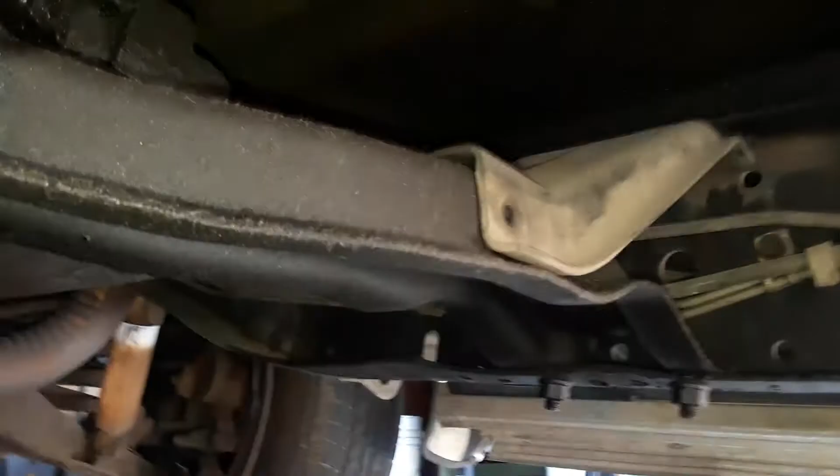Okay, Richard, we're under your truck. I gotta drop the exhaust to get to that transmission cover to see what the heck is banging in there. And I already checked the EGR. I already checked the ignition control mod, I mean the ignition coil. We put a new one in. So you already know that.

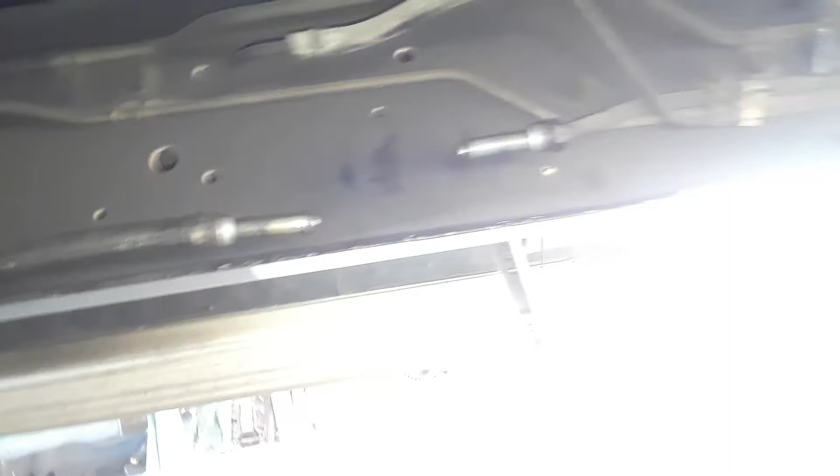And I was taking off your filter. There's your filter. Let's see. It's kind of dark. Let's see if I can brighten it up. It's as bright as I could get it before it looks distorted. But I took the filter off, and I'm gonna give you a zoom-in close look at your O-rings.

This end of the filter was already loose. So what you're doing is sucking in air bubbles through that side as it's being pumped to the front. This side was tight. But if you can look as I get it close, these O-rings are thrashed. There's the O-ring there. Those O-rings are no good, so I'm going to pop those off and put brand new O-rings there. But I do recommend that we change the fuel filter. That doesn't look like it's ever been changed.

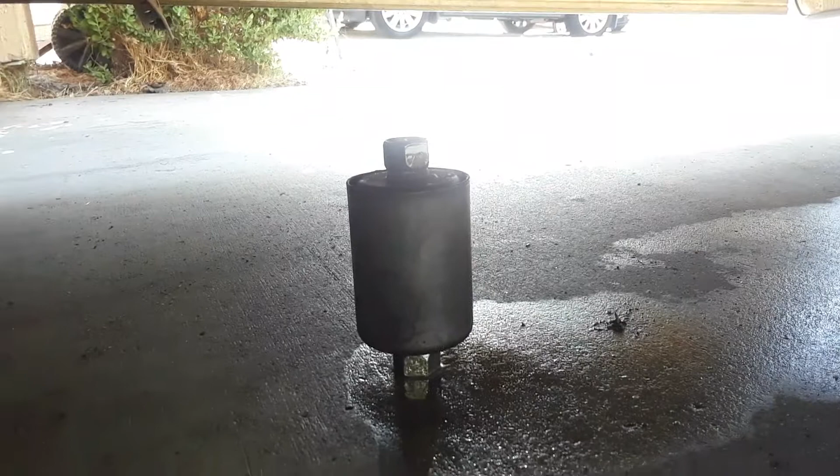It's pretty dirty. I don't know if it's from all the traveling or maybe you did change it before and it's just gotten... But we obviously see that there's a lot of miles been put on this truck. And if the fuel filter was changed, those O-rings should have been brand new. So that's why I'm assuming that that's an old fuel filter. So I'm going to recommend that we change that. That'll give it a little better performance. And maybe that's our problem with black fuel.

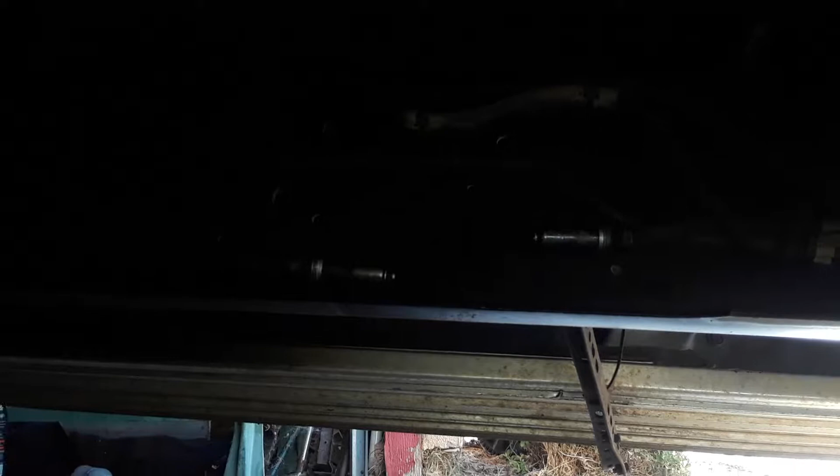But what I'm going to do is pull those O-rings off right now and stick my fuel pressure gauge in there. There was actually another part of the video where I was letting you know what we were going to do before I did it. It was going to be set up. But when I grabbed the phone, I accidentally turned it off. So I'm going to have to hook up a couple of videos together. So let me hook up the fuel pressure gauge and drop this exhaust, and I'll show you what our outcome is. Okay, now we got the fuel pressure gauge.

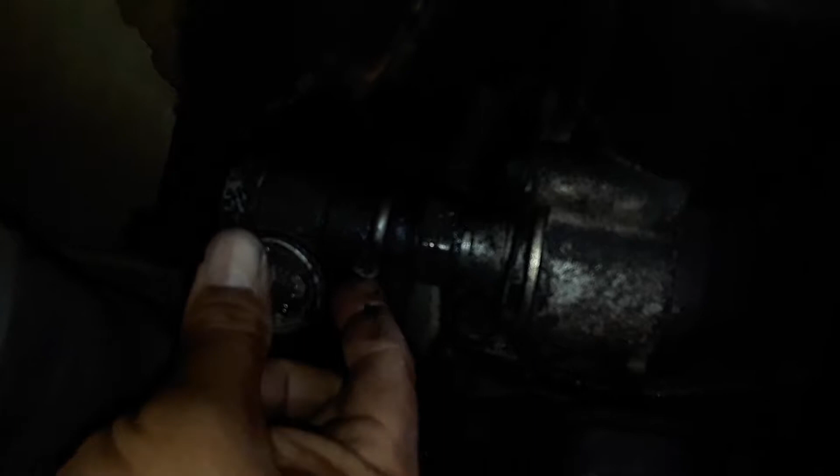While I was down here, I don't know why, but my hand went this way. Look what I found. This is loose, and I'm twisting it. This is for your speedometer cable. So I just want to let you see that before I mess with it. And we're going to go ahead and tighten that. So now it's nice and tight. I don't want to do it too hard. There's a seal right here. And if that seal gets pinched, it'll start leaking.

And here's your transmission mount. As you can see, it looks pretty okay. When you were doing the reverse and drive, I mean, it's wet. There's a leak somewhere, but it's not broken. So that's not the clanging. So next I'm going to take off the exhaust flange bolts on both sides, and I'm going to have to drop the exhaust down a little bit so that I can scoop that pan out of there. So let me go ahead and get that done.

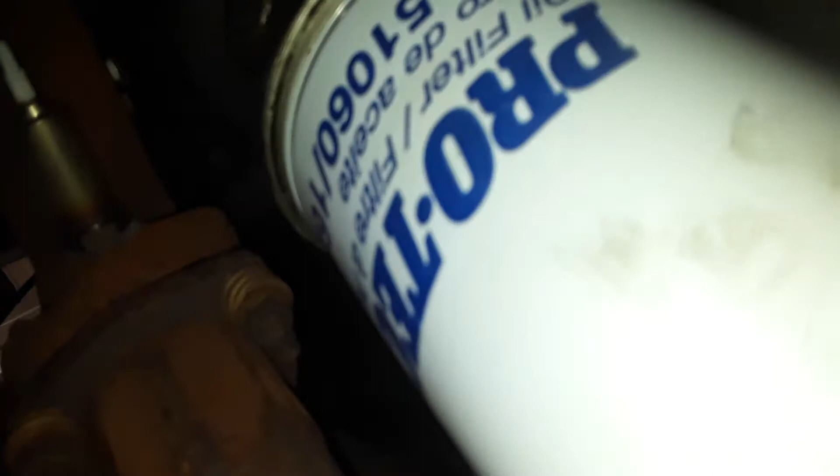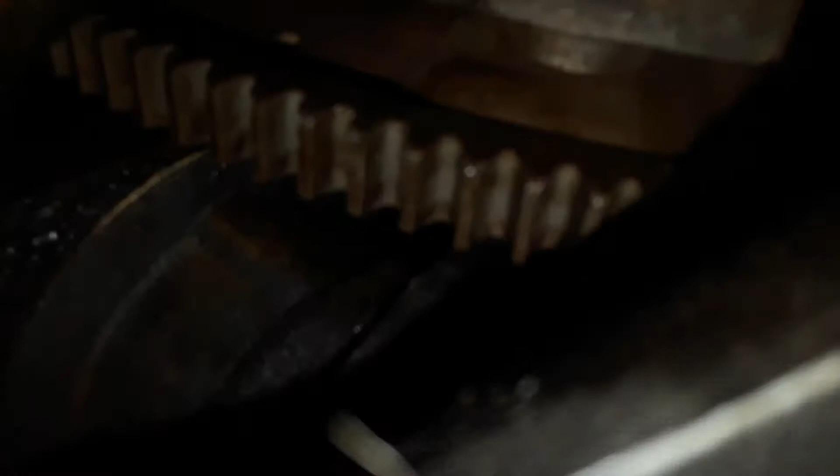Okay, those exhaust bolts are not budging, and I don't want to try to force them because if they snap off, we are in trouble. So I did manage to get the cover down. Let's see the cover loose right here. We don't got a real good clear shot, but we do have one at the corner, which is right here. And what I'm going to do is turn that flywheel with a crowbar to see what we see. I'm just going to spin it around and see if we see any cracks in it. If we see cracks, it'll be coming out all the way to here. So let me go grab a crowbar.

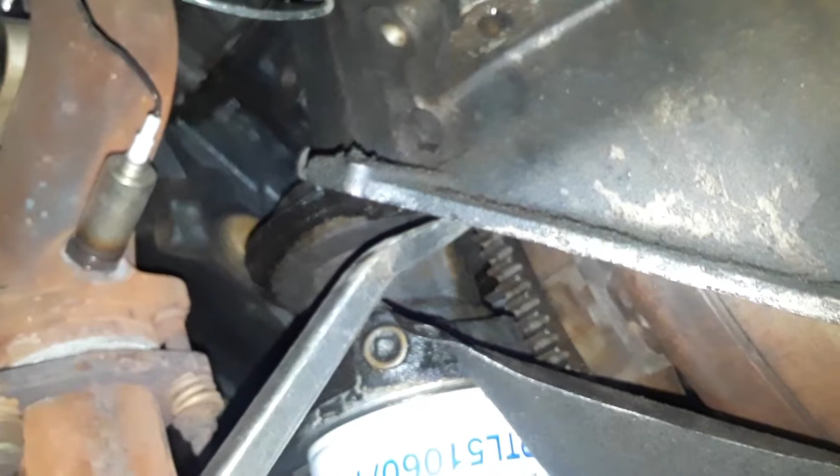Okay, got my crowbar. This part I'm going to put on video, Richard, because I want you to see what I see. So, try to get in like so. Hopefully the video stays right. It's just hard to get a shot of it while... I'll tell you what, I'll spin it. There it is. I'll spin it and look for the crack. If there's a crack, I can obviously already move it, and you can see the torque converter and the flywheel moving together.

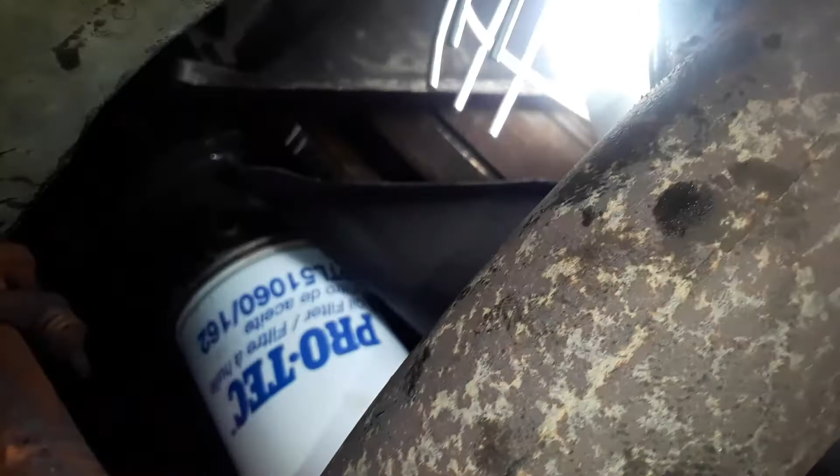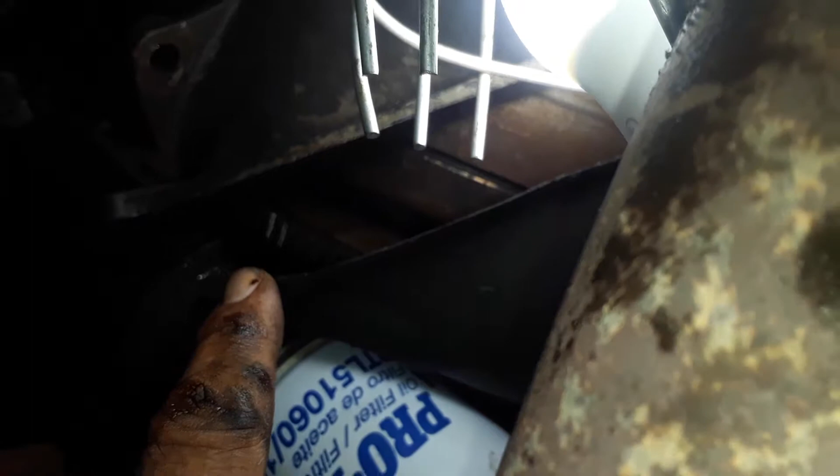It's hard to do this with one hand, so I'm going to pause the camera and turn it, and when I see something, I'll turn the camera back on to show you. I turned it about 2 inches before I realized I should mark it to know how far I've gone around. You can see those 2 teeth right there, I marked it with a silver paint pen. Now I'm going to turn it and go from there.

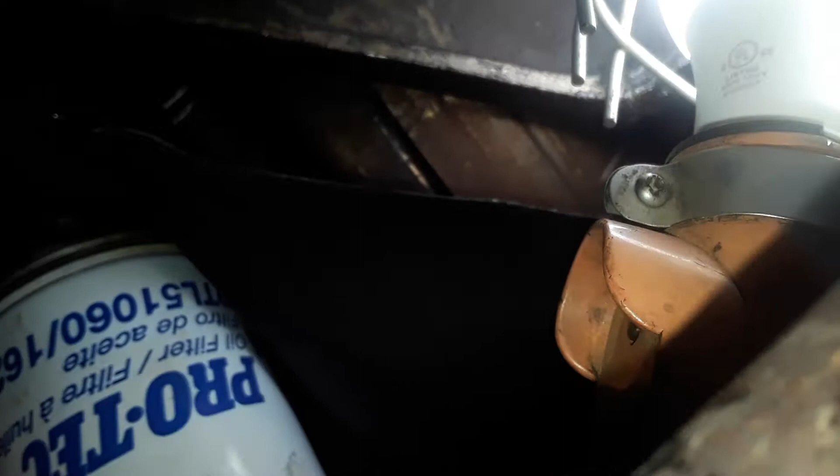Okay, I spun it all the way around. There are no cracks, so it's not the flywheel. I'm going to show you right now. Maybe I can get my top light out.

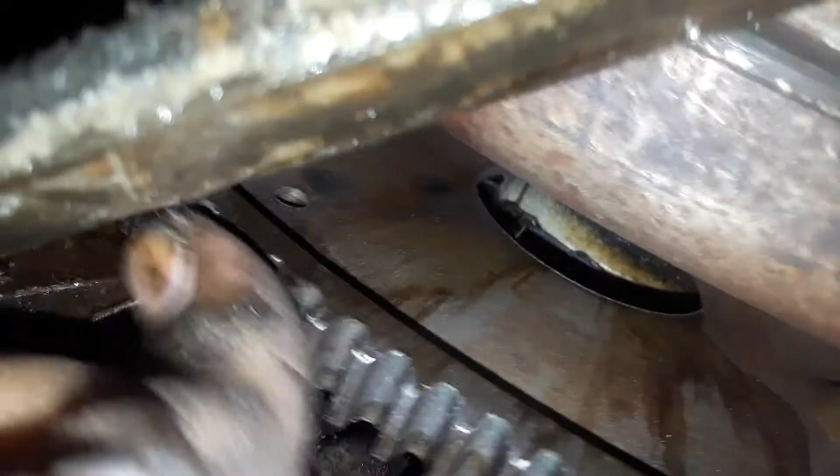But as I was turning it, I felt this. I'm going to see if I can get a closer look at it. That sound... what that is, your torque converter is shot. Oh wait a minute, I bet I know what that is. That is not the torque converter, because the torque converter is turning with the flywheel.

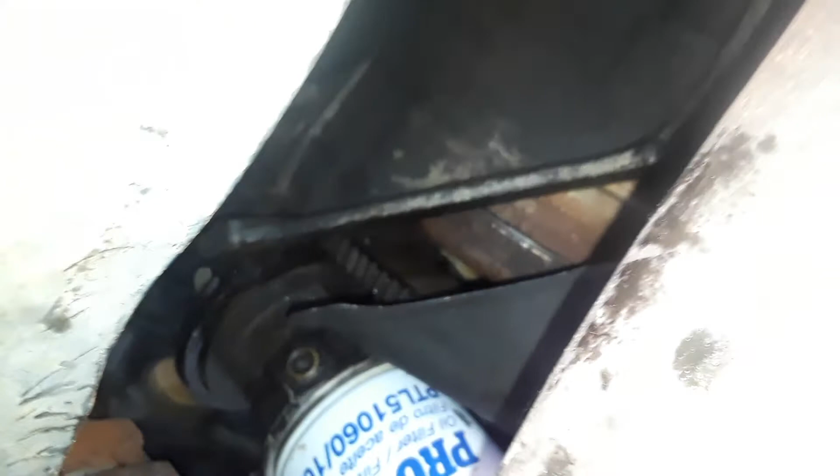Okay, now I'm going to show you what's happening. The torque converter is one with the flywheel, so it's the flywheel that's moving, and I shall show you on the whiteboard. Okay, I got it all ready.

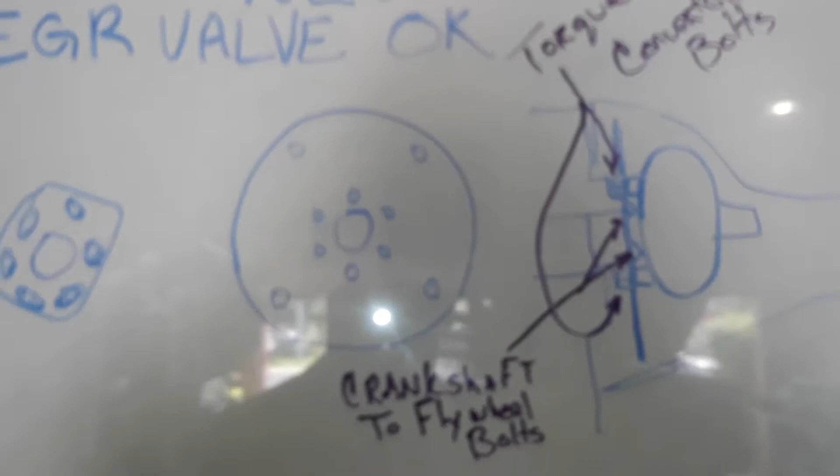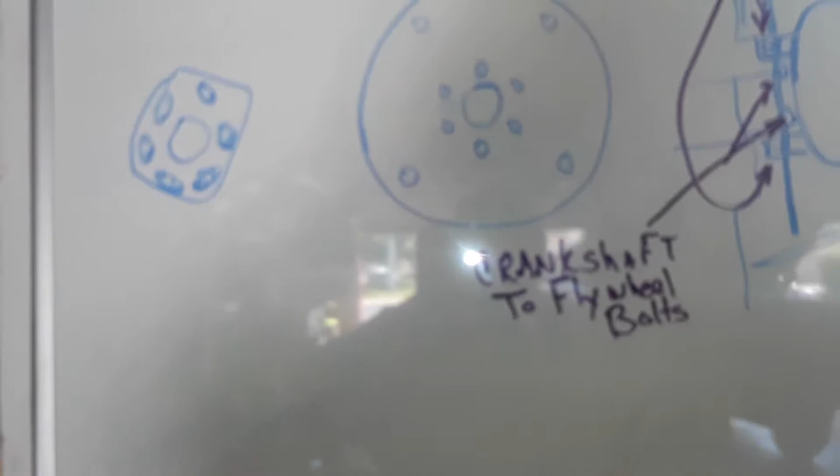I know what the knocking noise is for the 88 to 95 Suburban, Tahoe, whatever they have out, the Chevy full-size trucks. The rattling knocking noise solved. I was under this old Suburban, a 1989 GMC Suburban.

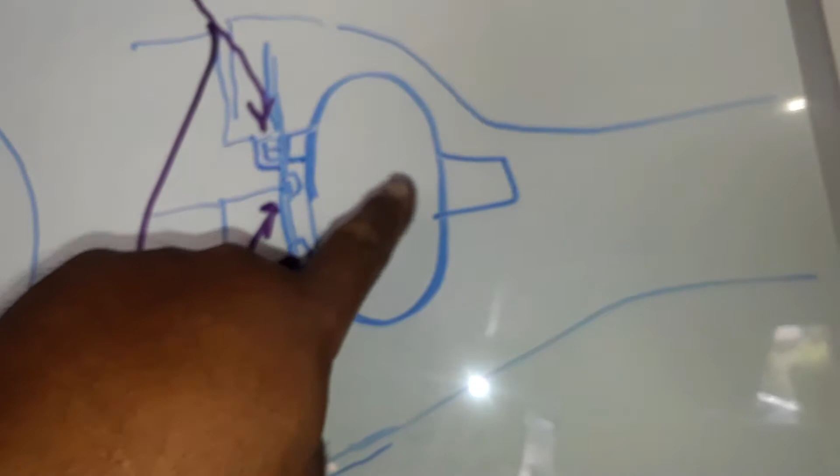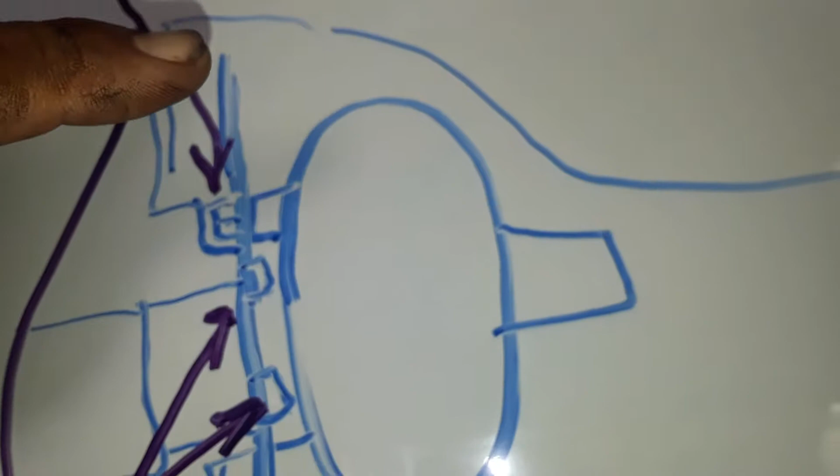We were getting the rattling, knocking noise, and couldn't figure out what it was. So I got under there to see if it was the flex plate, and you can see here's the flex plate, torque converter. Those are the little studs right here that mount the flex plate. These are the bolts that go from the flex plate to the torque converter. And then you also got the flex plate, and these are the bolts that go from the flex plate to the crankshaft of the block.

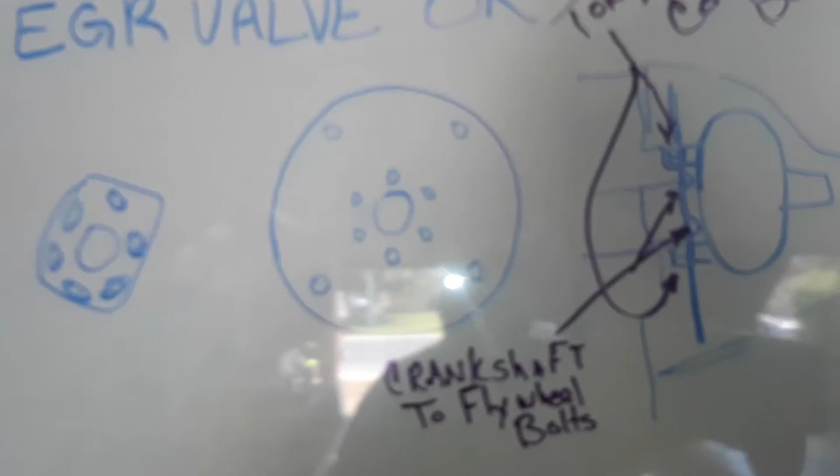Just so you can get a better far away look at it. This is the flywheel from the front view, if you were to have the tranny out. This is the crankshaft of the engine once this flex plate is off.

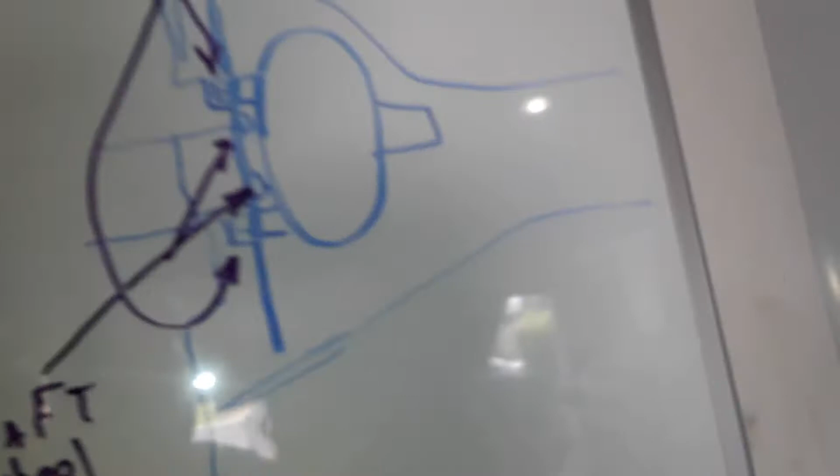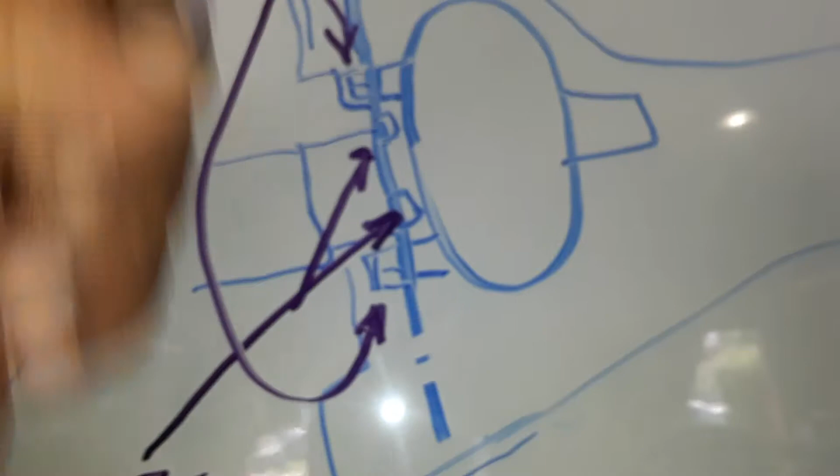Now, explanation of the rattling knocking noise. What I did was put 2 lines on 2 teeth so I could rotate the flex plate and see if the flex plate itself was cracked, and it was not. I turned it all the way around and the flex plate was not cracked.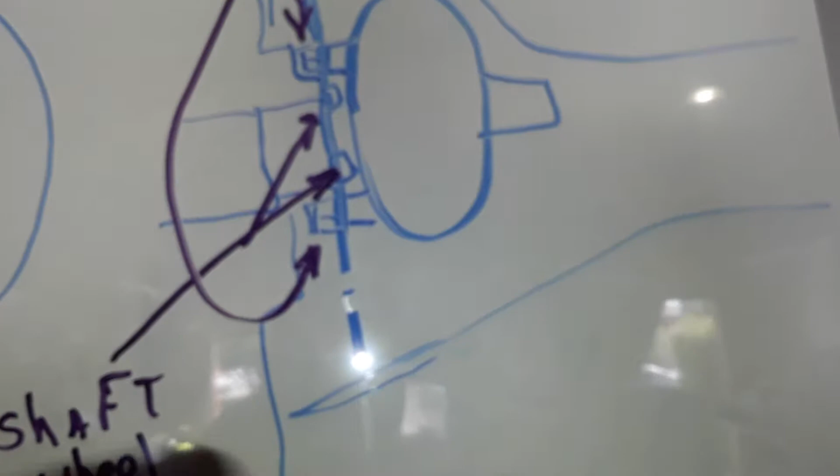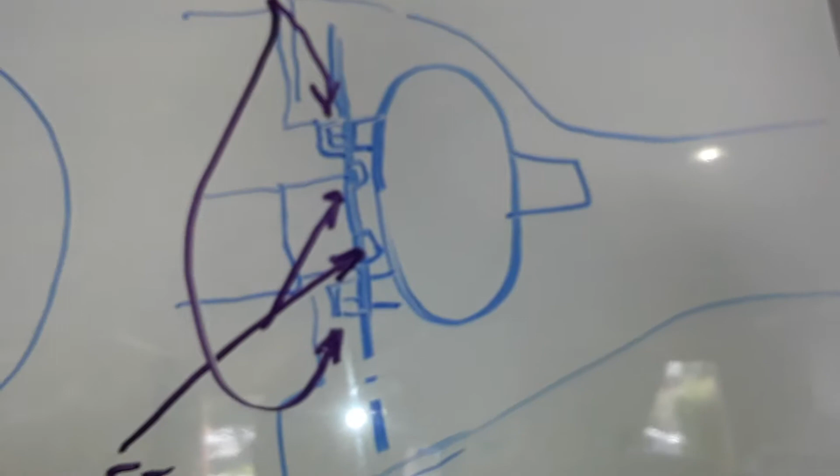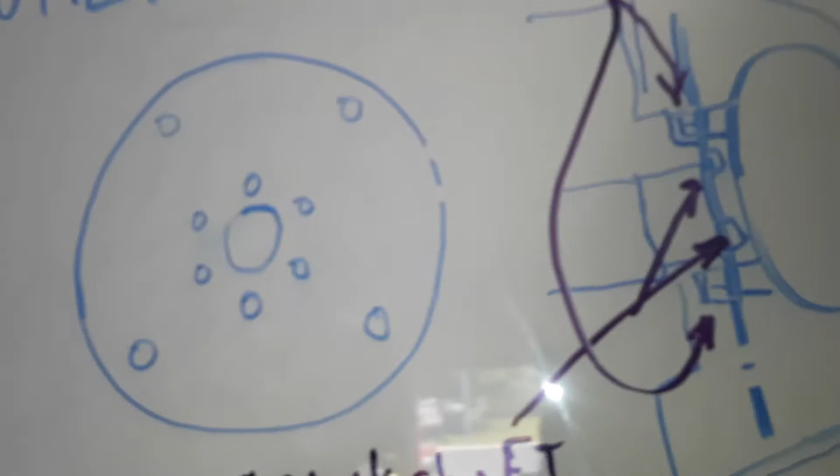Keep in mind, I wasn't able to take the cover completely down. This is just from what I saw, and you can also see it on my video to check my hypothesis. I was spinning the flex plate all the way around with these 2 teeth marks that were painted silver. Once I got them all the way around and back to where I had it, the torque converter turned with it.

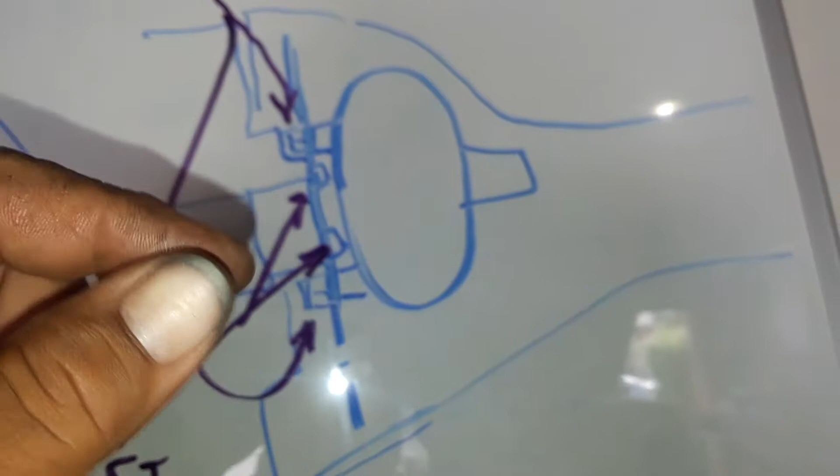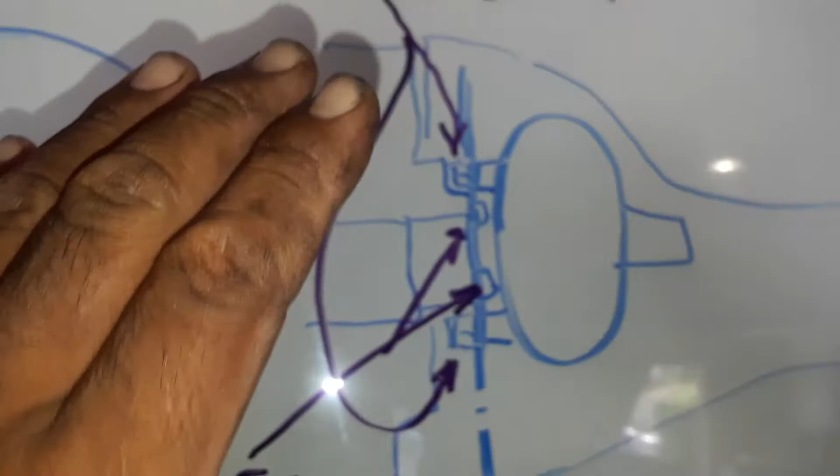You can see that when you're turning it with a crowbar, the flex plate has a little give. I didn't see any movement between these bolts. But as you can see, when I was rocking that torque converter up and down like that, it shouldn't do that, because if the engine's not rotating, you shouldn't have any play going back and forth. So what happened was the crankshaft bolts got loose and came undone.

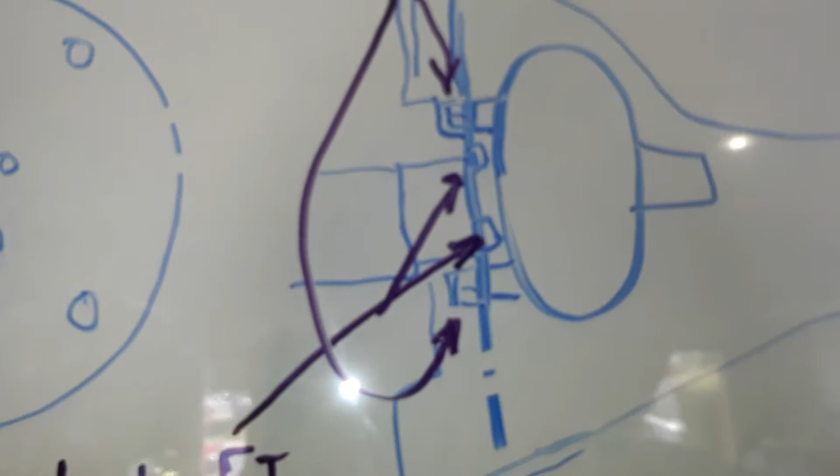And you said you've been driving it like that for a number of months. Now what's happened is the transmission has to be dropped for those crankshaft bolts to be retightened. The only thing is, you drove it so long - here's these 6 crankshaft bolts, you drove it so long, these are all tight, these are all loose. But you drove it so long, now the crankshaft holes where the bolts go are oblong like this.

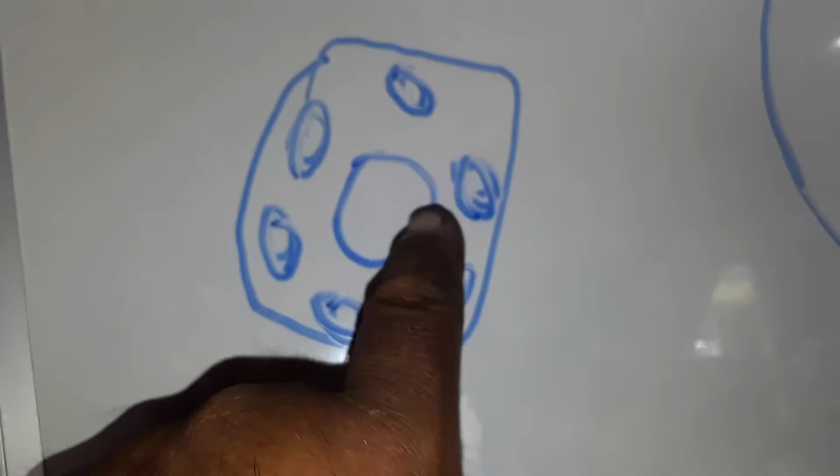Which is causing that back and forth play. You can even hear it in the flex plate. But if you did it for a month, I can guarantee that crank is ruined right there. So it's drive it till it breaks or till it doesn't work anymore.

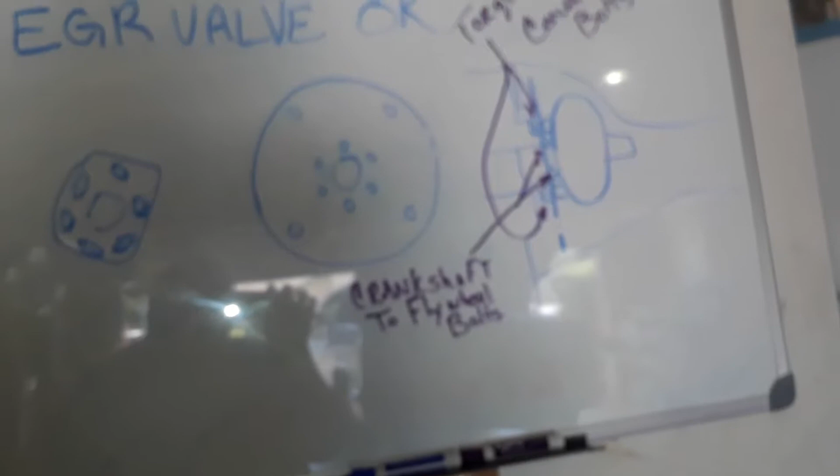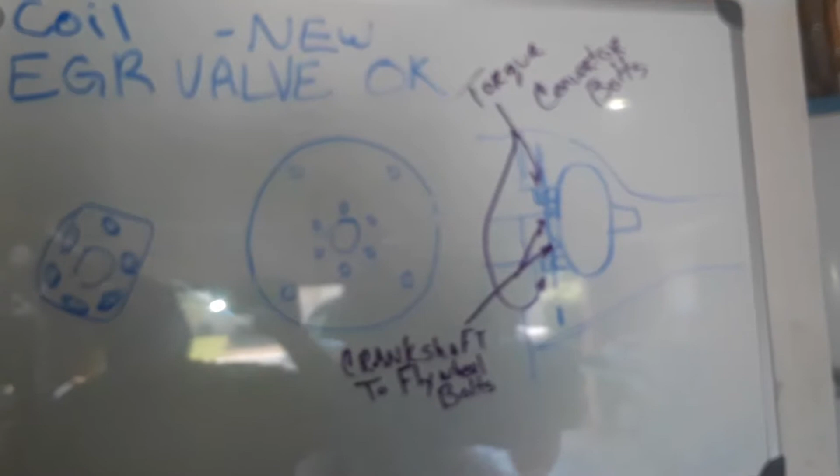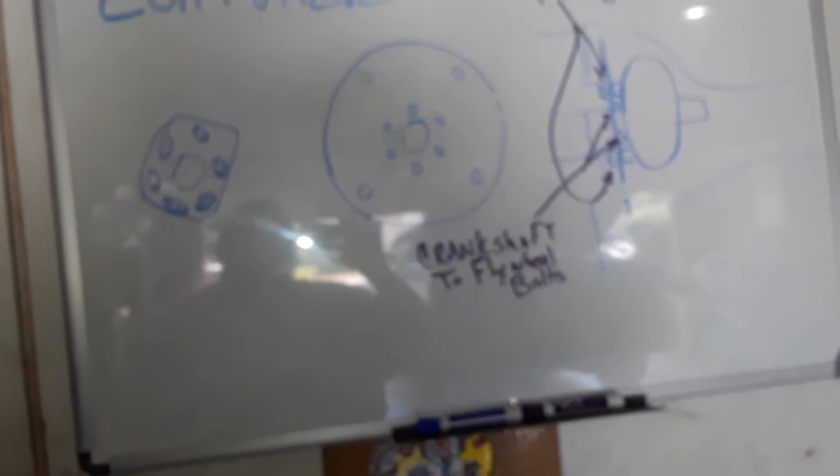Or have a technician pull the transmission out and let him know what my hypothesis was, what to keep an eye out for, and to see how far the damage is. That's the big thing about this, how far did the damage go. You said you've been hearing it for about - you got it, and then 6 months later you started hearing it, and after a number of miles you've just been dealing with it.

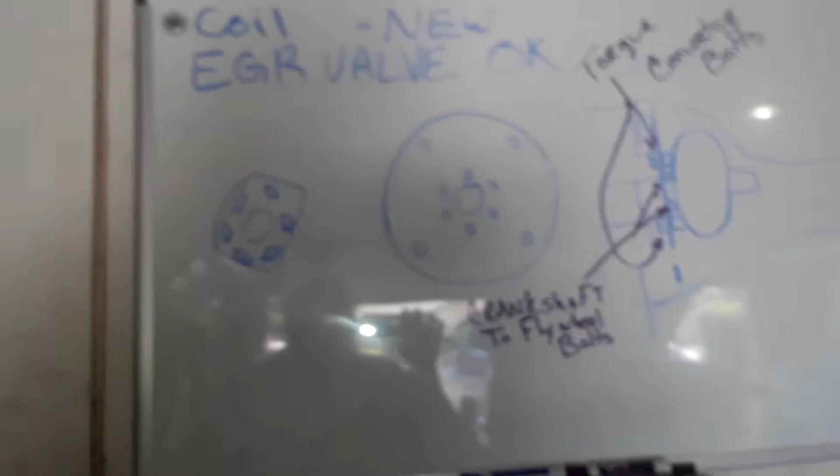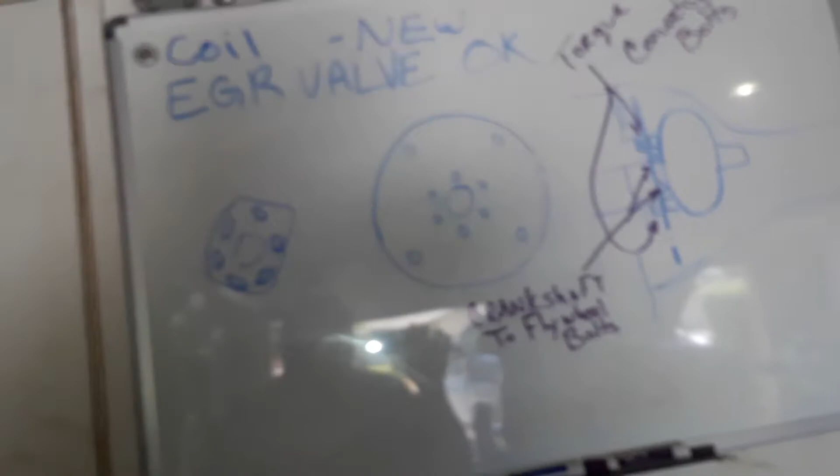If you once heard a knocking noise and rattling noise that bad, you should immediately stop driving the vehicle, because a knocking noise that bad means something severely damaged. I'm not saying it was engine damage or transmission damage, but something is really wrong, and it should have been checked out immediately. So what I did was just pull the access cover.

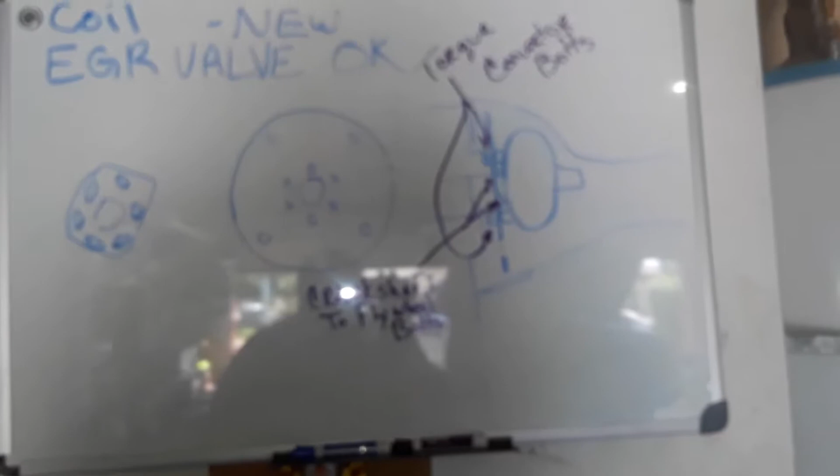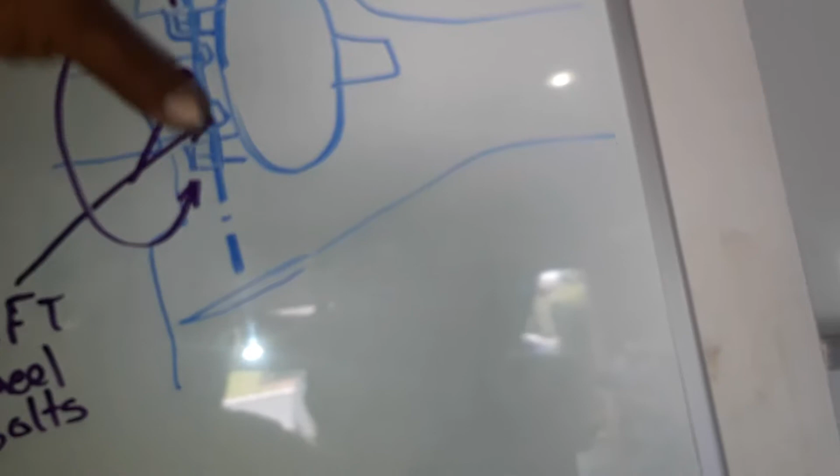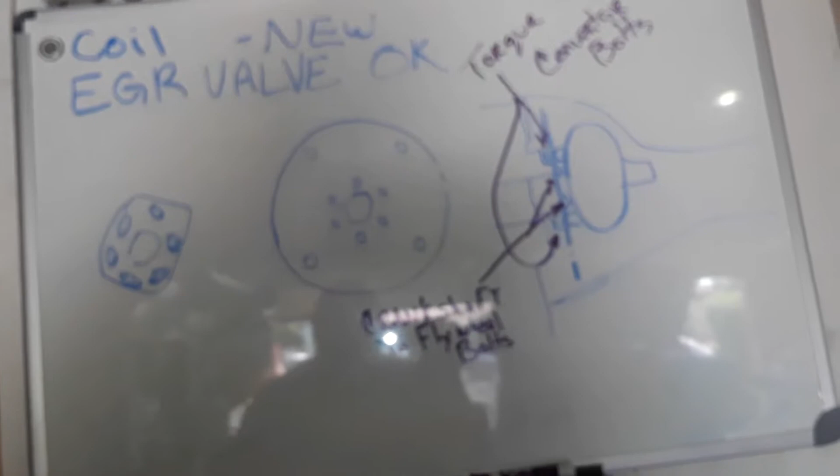If you guys want to try this on your vehicles to see what's going on, see if the flywheel spins together with the torque converter. If it does and you don't see movement here and here, grab it by hand and go back and forth to see if it's free from the crankshaft. That's how you'll figure out if the rattling, knocking noise is either the crankshaft bolts that are loose or the torque converter bolts are loose.

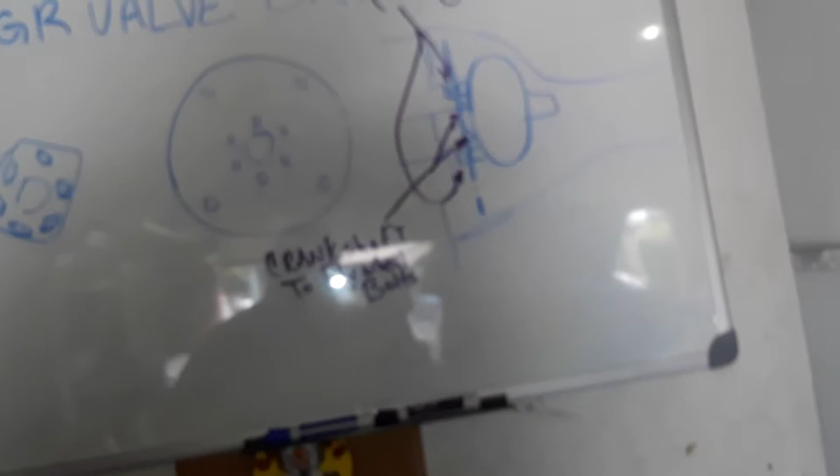You'll also be able to tell if the torque converter bolts are loose if you see a little movement between the flywheel and the torque converter. But I saw movement between the flywheel and the crankshaft, so that's how I figured that out. That's my hypothesis, so yeah, that's too bad.

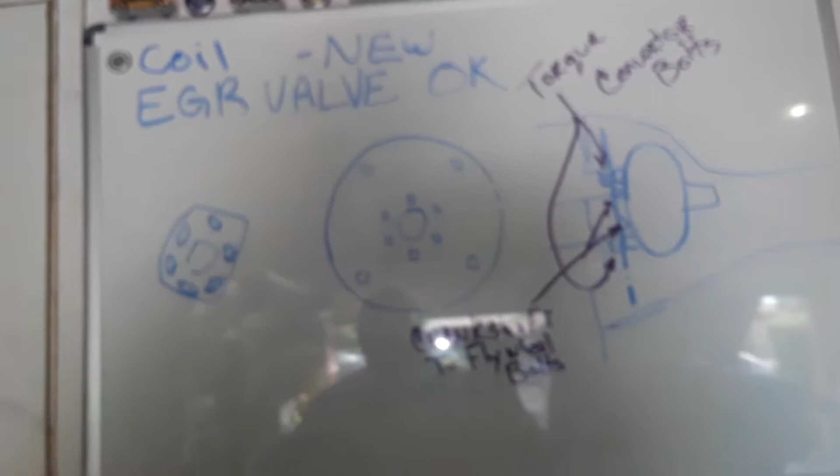This car is not safe to drive all the way to New Mexico, being that you're here in Bakersfield. So I'm going to go on doing the fuel pressure test. Oh, and I also wanted to tell you my hypothesis about why the engine's shutting down.

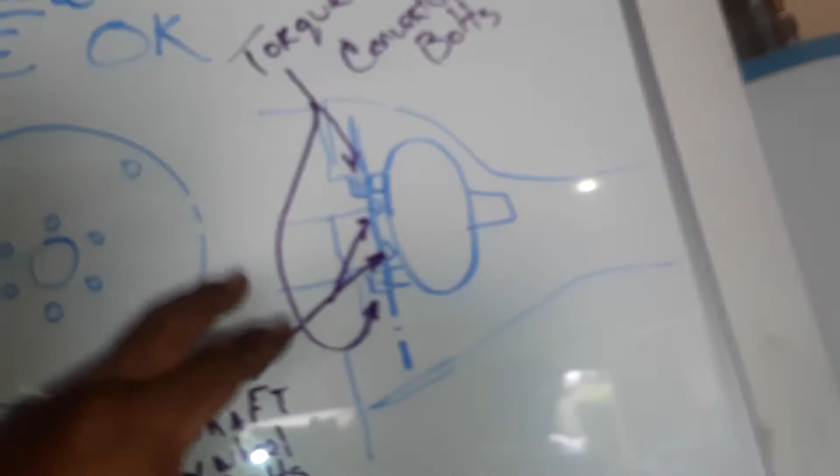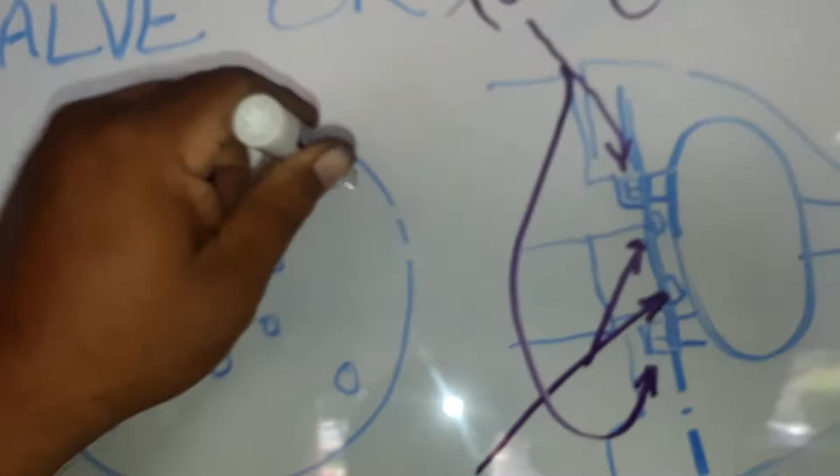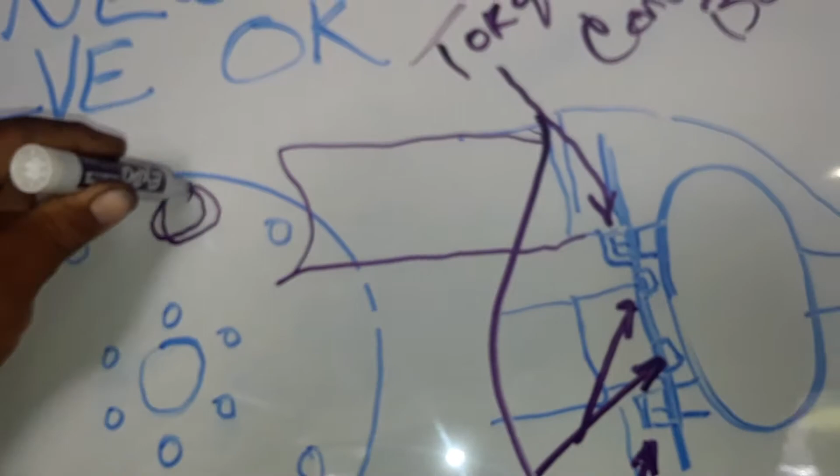Passenger side, we'll pretend we're looking through the block at the passenger side. This will be where the starter is. Right here is a knock sensor. The knock sensor wants to advance or retard your timing if it starts to hear pinging.

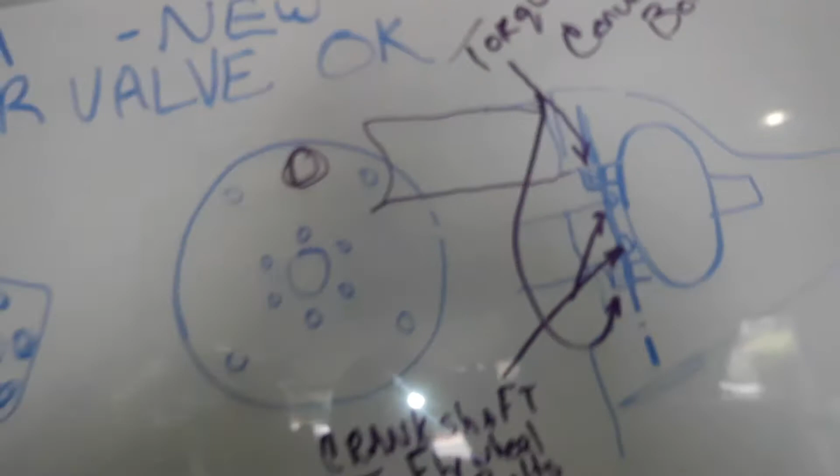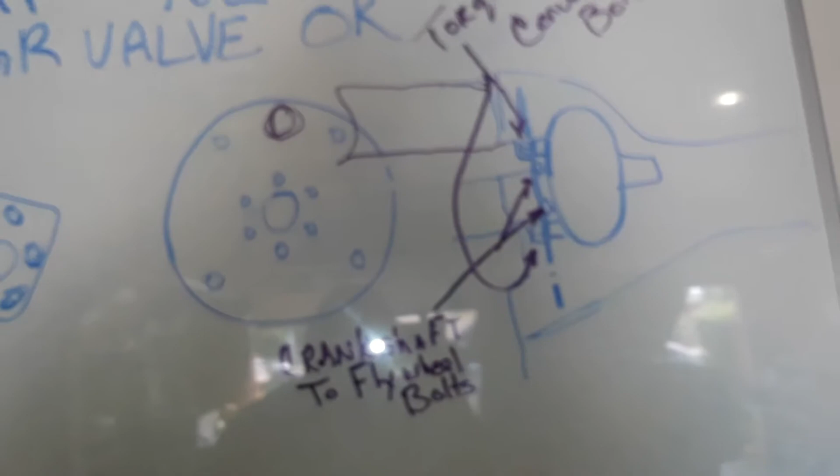Or knocking. If you're getting this knocking, this knock sensor is picking it up, and it's telling the computer... I don't know which way it goes, either advance or retard, but it's going so far to try to correct that knocking noise, thinking it's pinging in the cylinder, that it's shutting down your engine. So it's a big problem.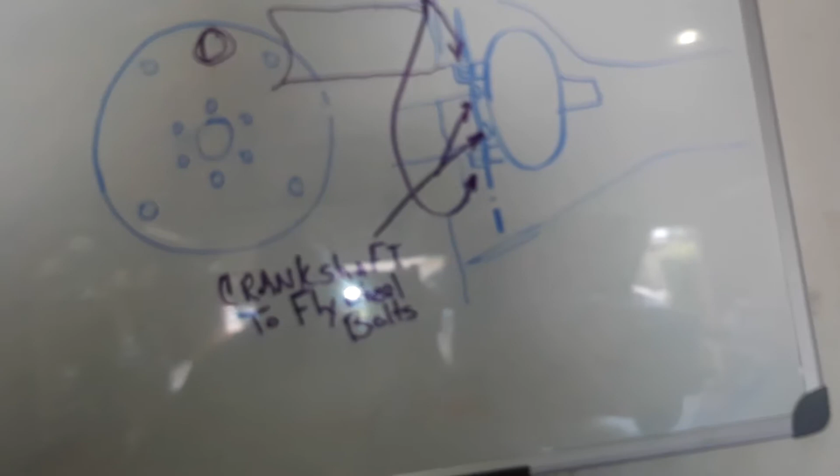I definitely don't recommend you take this vehicle to Mexico, not the way it is. But it is what it is, and that's what I got figured out. So we're going to still continue to do the fuel pressure test and make sure your fuel pump is good.

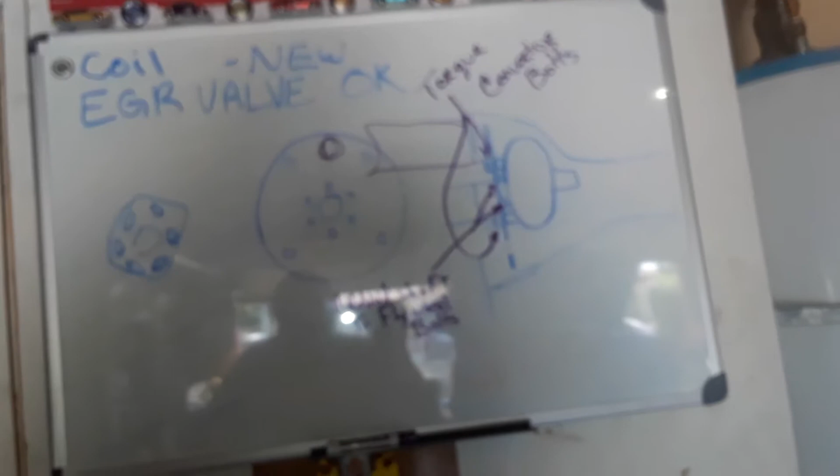We went ahead and tightened your fuel filter. Like I said, the back of that fuel filter was loose, so it was sucking in air through there, so that could have been a problem also. But that fuel filter does look old, and I do recommend replacing it.

Also, I'm going to go ahead and put that cover back on because I can't do the job here, it has to be taken to a shop, because they're going to drop out the drive line and the transmission. It's got to be up in the air for you to be able to see everything properly, especially the threaded holes inside your crankshaft.

So let's continue with the fuel pressure test, and we'll make sure that your fuel pump's good. Oh, and just for reference, I did find the connector.

If your ICM was bad, you disconnect the connector and it starts right away. It's an ICM problem because you're taking the computer out of the loop, which is not igniting the ICM. It'll allow it to get power from another source, which I think is the ignition coil. I'm not sure, but that would be a good test on your vehicle, the GMC Suburban 1989 5.7 liter. This is where you'll find it, next to the power booster.

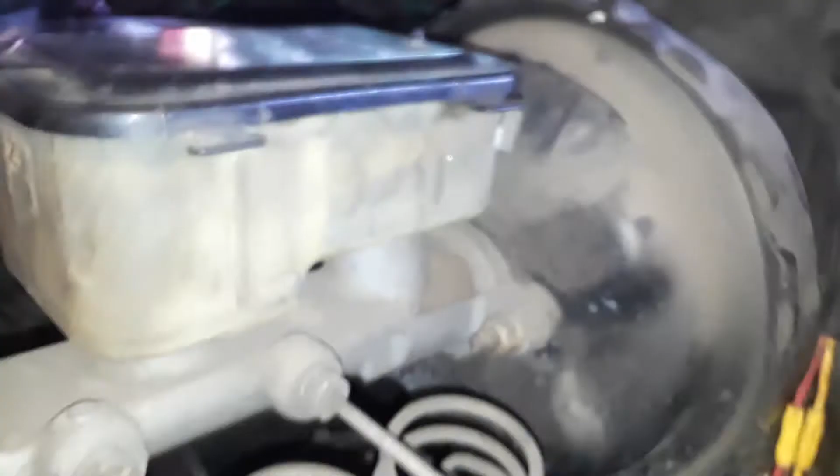Let's continue with the fuel pressure test and go from there. Okay, what I'm going to do is energize the fuel pump.

I'm gonna have to ignore that call until I get my video done.

Now I'm gonna go down there and see what the fuel pressure is. Wow, it's at 0 still. I can see it from here. Maybe I ought to click it one more time.

Oh, that's bad. So you can hear the rattling noise as it's running. So I'm gonna get down there and see what the fuel pressure check is.

Okay, I'm gonna turn it off real quick, so that we can go down there and see it close up where it's at. Okay, also, this is what I'm seeing.

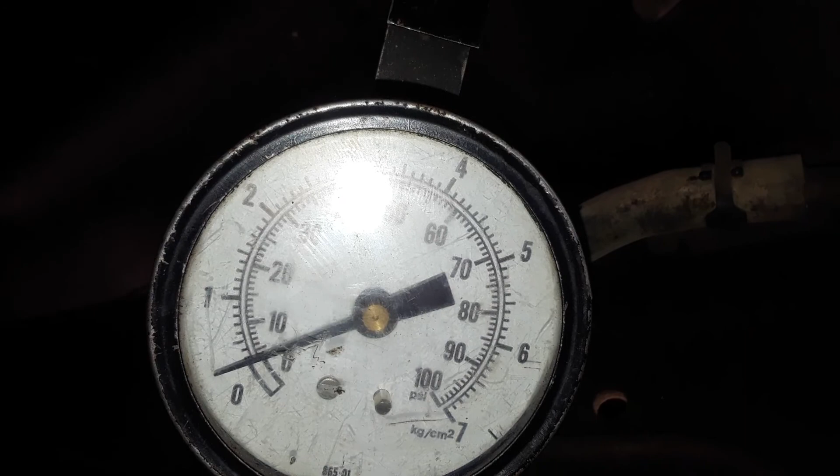Fuel pump ending pressure. I don't want to get down here with the engine running, but I want to try. I want to put my safety first, let's see if I can tilt this camera.